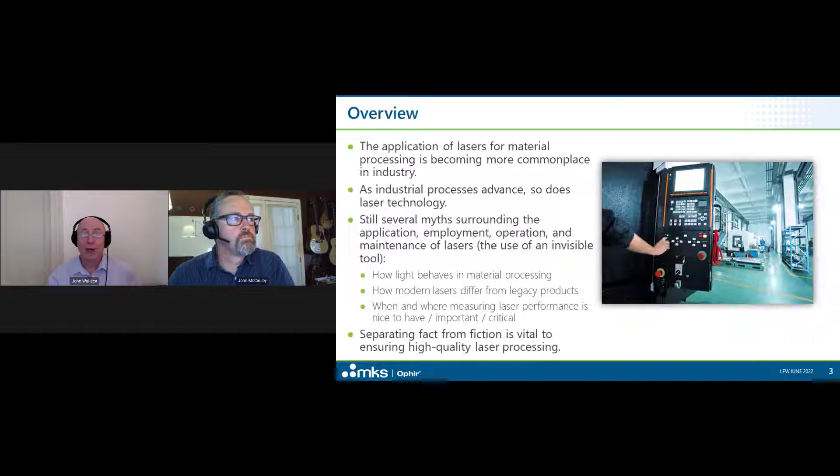Today's event, Laser Myths: What You Don't Know Can Hurt Your Process, great title, will be presented by John McCauley, Business Development Manager at Ophir.

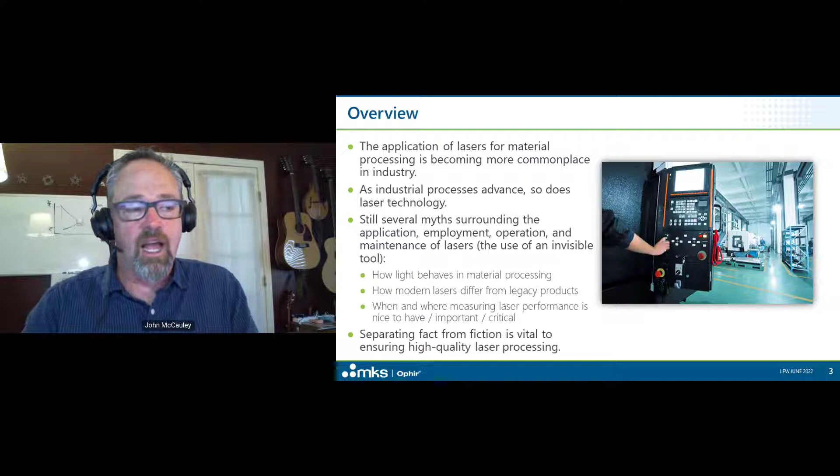So separating fact from fiction, separating these myths from what is actually going on, is really vital to ensuring that you, first of all, start off with a high quality laser process, and second of all, maintain that laser process at a high quality. So that's really why we're here today.

So, when we talk about the maintenance, the operation, the purchase of a laser system, there are a lot of similarities between that and the purchase, the operation, and the maintenance of an automobile. So I'll try to tie a lot of these concepts to the operation of an automobile, because I think that's something that we can all relate to.

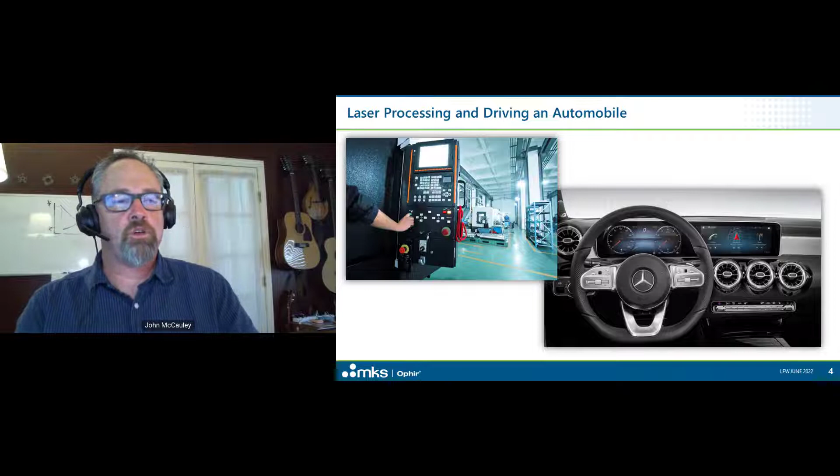We're all very familiar with it. We've all purchased vehicles. We've all maintained them and operated them. So whenever possible, I'll hopefully be able to tie that illustration into what I'm talking about to make the concepts a little easier.

So what we're looking at here is a picture that I grabbed about 3 years ago. It is the dashboard for a Mercedes-Benz A-Class. At the time, I think it was a concept.

I'll be honest with you, I don't know much about Mercedes-Benz cars. Ophir just simply doesn't pay me that much.

But anyway, I assume that this is very similar to the way dashboards are looking today. So if we take a look at this dashboard, we can start to get an idea of the types of information that we get from it. There's information that is vital to its operation. There's information that's nice to have. There's information that's very helpful to its operation.

We start to look at all these things that we read. We've got the speedometer, the tachometer, the odometer, the fuel lights, the engine lights. We've got GPS. We have phone. We have all this information that we're almost being bombarded with. And again, a lot of it is very useful to the operation of this vehicle. A lot of it is vital to the operation of this vehicle. A lot of it is vital and useful when it comes to the maintenance of this vehicle.

We've just grown used to having a lot of information being presented to us. And that's the way we, in this day and age, operate and maintain a vehicle. We'd like to have this information. We'd like to know how our car is performing. We'd like to know when maintenance items are relevant.

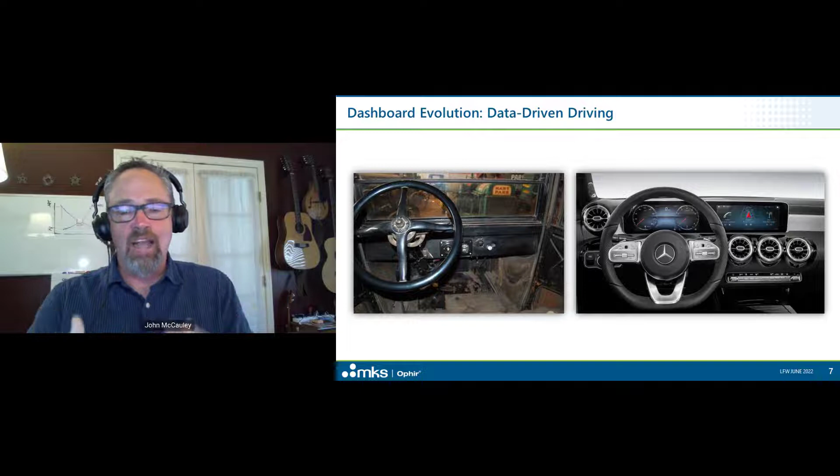So why would we operate and maintain a laser system, which is more expensive? It makes you more money. Why would you operate that with the same mindset, not knowing how it's performing? So that's kind of what we're here to talk about today. You look at these two cars side by side, there's roughly 100 years difference. So there are a lot of changes, a lot of general changes that we'll talk about just in a second.

Obviously, technology has changed. There's more stable performance. There's more creative engineering of the processes. So all the thousands of processes that go into the making of the modern day vehicle have evolved over the years, as well as the production environments that these vehicles are made in. They've become smarter. They've become more efficient. A lot of things have changed over the years, but there are some things that are similar between these two vehicles. What remains consistent?

Both of these cars still must be maintained. They must be repaired. Automobiles are still made up of physical matter, things that you can touch. And because of that, there's going to be catastrophic failures. There's going to be changes that happen because of just being made up of physical matter. Also, the operating environments in which these two cars are going to operate haven't really changed that much in 100 years.

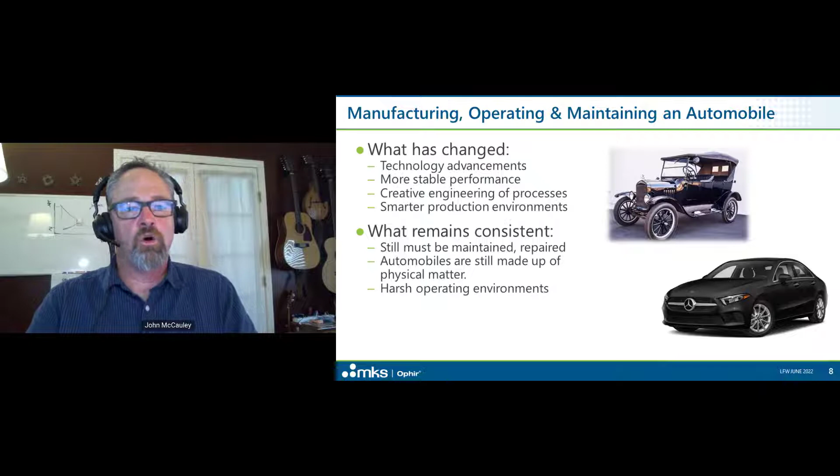Very, very harsh operating environments. So sand and wind and heat and snow and cold and rain, all these things take a toll on the vehicle, which affects its maintenance and its operation as well. So tie that to the example of what we're talking about here today. What's changed with lasers over the years?

There's been material advancements. The materials that are going into these processes have changed, have become more sophisticated. The laser sources have become more stable over the years, just as technology gets better. There's been more creative engineering of the work cells. Systems integrators are doing a fantastic job with taking some of the problems that have evolved over the years and solving those problems in the work cells.

Much smarter production environments, and much smarter from the collection of data in some cases, allowing you to make those processes smarter. But there's also things that haven't changed, very similar to those cars. The applications of the lasers are always going to be pushed. The operational parameters are always going to be pushed. Faster cycle times are attempting to be achieved, so you can get parts out the door quicker. Quality is attempting to be increased or at least maintained at the same level.

Lasers and laser systems are still made up of physical matter. There's still going to be those sometimes catastrophic failures of components just because the systems are made up of physical matter. Also, very similar to the automobile, the harsh production environments that these lasers operate in sometimes have very catastrophic effects on the laser system. They must be dealt with in such a way that they don't drastically change the performance of the laser.

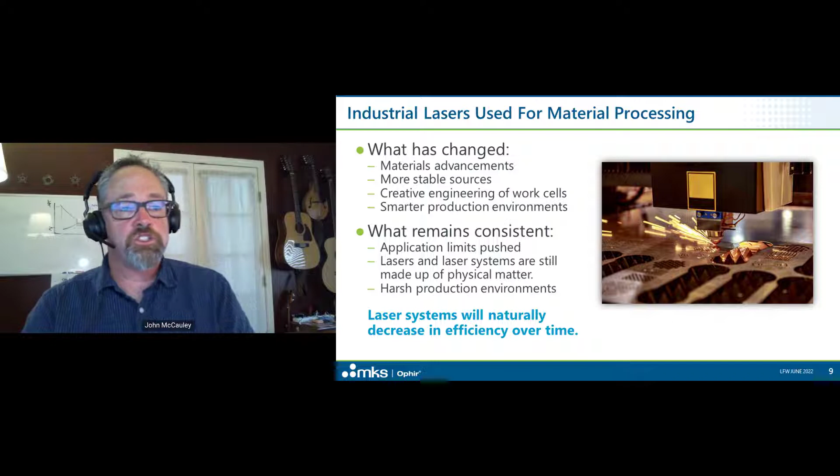But having said that, laser systems will naturally decrease in efficiency over time. It's very important, I'll make the case today, that through the measurement of its performance, that's when you know how and when to take proper actions on your laser system when those changes take place. Okay.

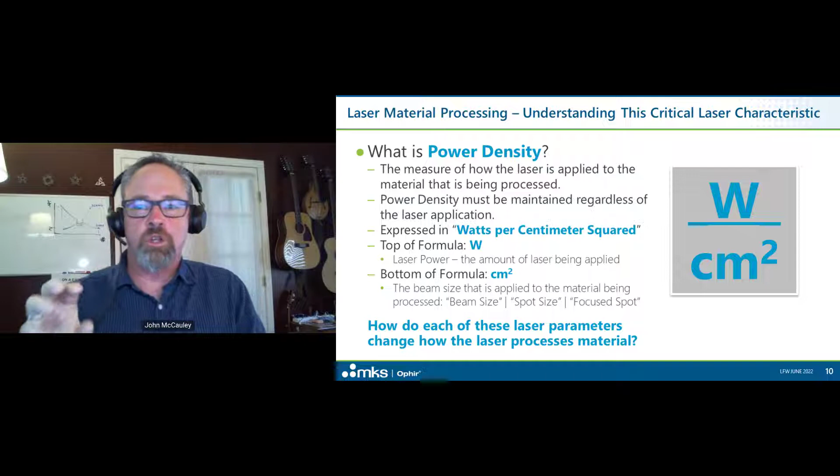If I could take your car, and with respect to the maintenance of your car, put that battery current thing on your dashboard and have that be your indicator on your laser system of when you must take action, what would that one single laser parameter be? And that is the idea of power density. So what is power density?

I like to define power density, just in a general term, as the measure of how the laser is being applied to the material that is processed. It's really where the rubber meets the road with respect to laser processing, where the laser light meets the material that it's processing. That is really how the laser is defined with respect to how that laser is going to interact with the material that's being processed.

Power density must be maintained regardless of the laser application. And what I mean by that is it doesn't matter if you're using a laser for welding, for brazing, for cutting, for marking, for heating. The intended result of the laser requires some kind of power density. And the power density is defined by two laser performance characteristics. It's expressed in this expression, watts per centimeter squared.

You see in the top of this expression, the laser power. The laser power is the W, it's the watts. It's the amount of laser light that's being applied to the process. The bottom of the expression is centimeter squared. This represents the beam size, the spot size, the focus spot size. It's called several different names, but it's the amount of laser light that's being focused down to the process. And those two characteristics are going to define how that laser interacts with the intended process to have the intended result. How do each of these laser parameters change how the laser processes the material?

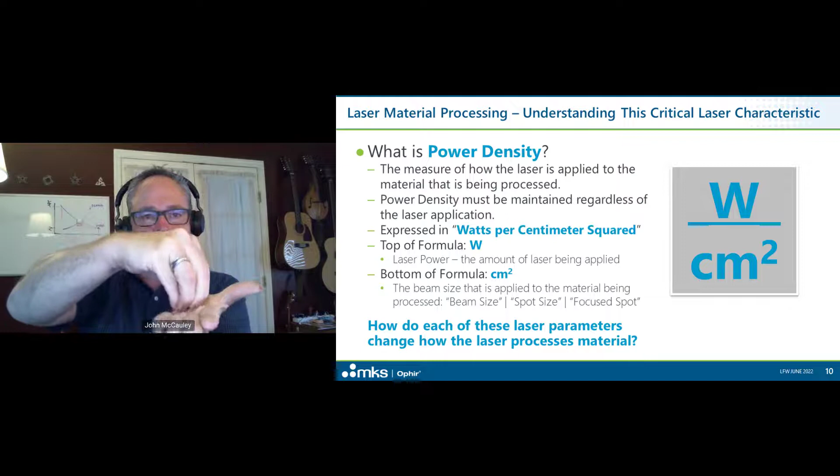There is sometimes what's called a thermal effect that happens on your laser system that causes the location of the focus spot to drift upwards. So now instead of focusing down on the process, you have a focus spot that is drifting off of the process. What's that doing at your work plane? It's increasing the beam size at your work spot. So that is increasing the beam size at your process, which is going to do what to the power density? It's going to decrease your overall power density. It's going to, again, reduce the efficiency of that laser process.

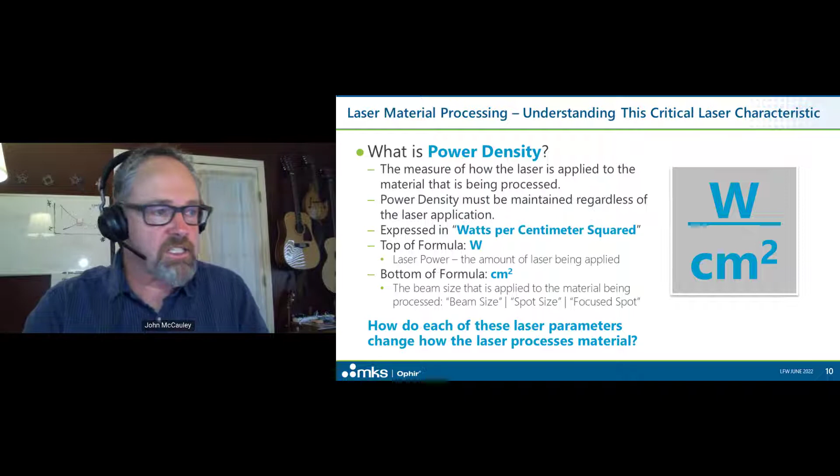All right, so we come to the myths. I'd like to share with you 5 myths, 5 things that have been told to me over the years with respect to laser performance and why or why not you should measure your laser. Okay, so myth number 1: our laser is very new and very stable. Measuring laser performance isn't necessary.

Okay, so getting back to the automobile, this is oftentimes a mindset that we can adopt when purchasing a new car. Hey, I've bought the new car. I'm in the driver's seat. I can smell it. I'm driving down the road. Nothing can stop me. Nothing can go wrong with this new car. But how often have you heard a story where something goes wrong with a new car? It does happen, unfortunately. We have put a lot of faith into the manufacturing of that car when we buy a new car. But the fact of the matter is oftentimes things can go wrong, even though most times they don't. So let's address this myth.

No matter how a laser is being used, the success of a laser process depends on how the laser is performing. Okay, regardless of where in the life cycle that laser is, the performance of that laser is going to be directly related to how that laser is going to process the material that is being processed.

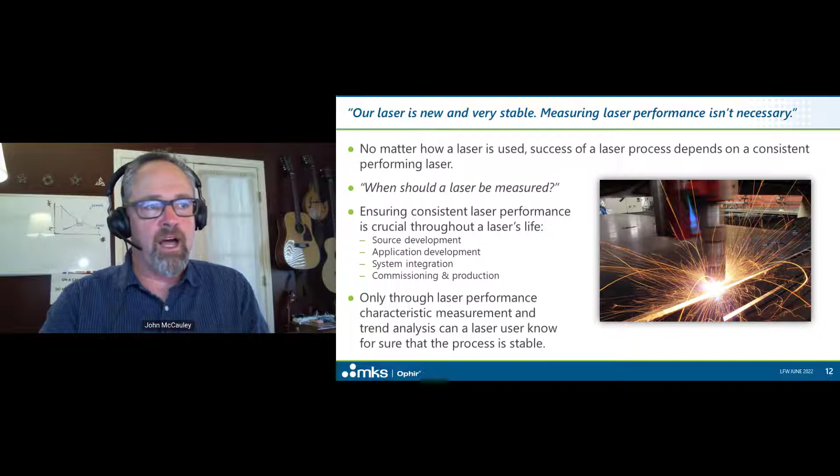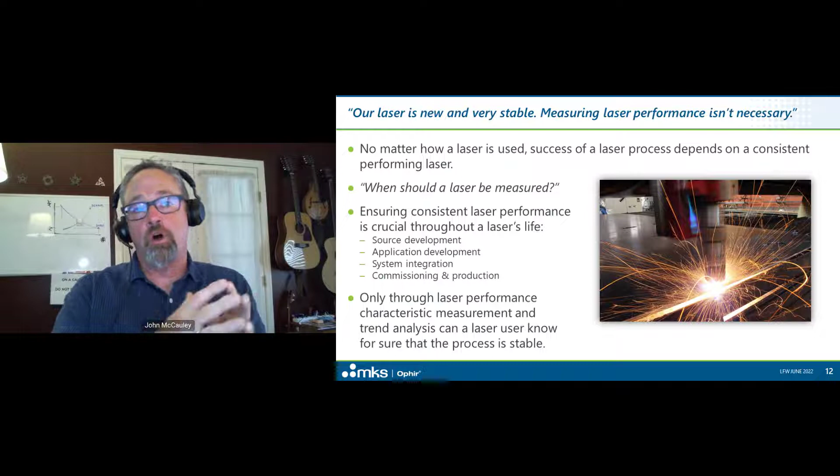So those measurements are very crucial in my mind, and very important to take with respect to the lifetime of that laser. I'll make this statement: only through laser performance characteristic measurement and through the analysis of the trends of these characteristics can you really fully understand how the process is stable over long periods of time. Okay, and I think that's probably realized by most everybody here.

Myth number 2: when the process starts to drift, we just turn up the power and we keep going. This is a pretty ugly one. This is one I'm actually in the process of helping a customer with. Oftentimes there's this myth that when you lose power density, the laser's not performing the way it's engineered to, I'm not going to take a measurement on it. I'm just going to start to tweak on little things here and there. I'm going to turn up the power. I'm going to change the rep rate. I'm going to change the cut speed or whatever else to overcome these drifts in the process.

I'm not going to actually solve the problem. I'm not going to get to the root of why this is happening. I'm just going to make tweaks on the process until I can get it to where the process is consistent. So if you're driving your automobile and you get an engine light, you take it to AutoZone, just clear the engine light. I just want to go on down the road.

I think most families have been in the situation where money is tight. You're not driving the best vehicles. And there was a time when our young family had a minivan. It was a Chrysler Town and Country, and we had the engine light come on, and we went and checked it, and it was a problem with the CPU, some just random code that the CPU was throwing. And it was change the CPU for $1,500, and the only thing that's going to happen is the engine light is going to go off.

There's these environmental factors, the heat, the humidity, the operating environment is just dirty. Contaminated cooling water or purge gas, these can all affect the performance of the laser in some way.

Kind of as a bonus myth, I'll tell you that oftentimes when I talk to relatively older fiber laser cutting people, they probably cut their teeth on a CO2 system at some point, and those maintenance practices have carried over into the fiber laser world. Well, I'll tell you that those optical components are very, very different, and the maintenance of a fiber laser today versus the maintenance of one of those CO2 systems is very different and should be treated as such.

Those modern day optics of the 1 micron lasers are very delicate, and you just can't treat them like the robust optics that you could with a CO2 laser. So just a bonus myth for you.

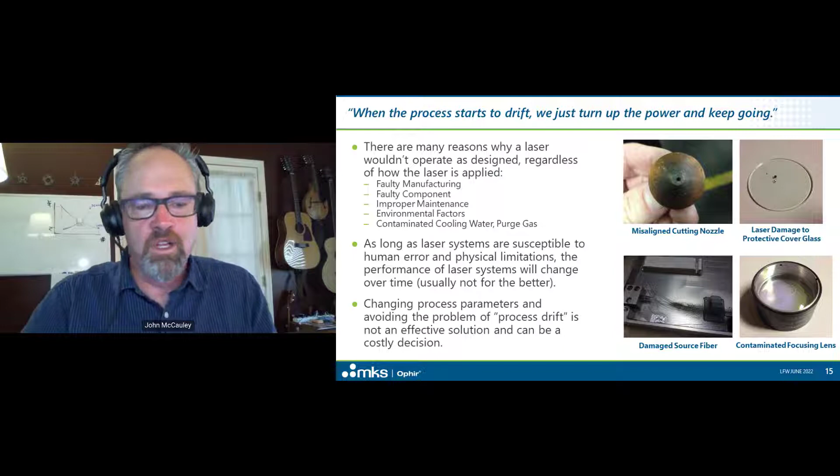Changing process parameters and avoiding the problem, which is really what this is, with some kind of process drift, is not an effective solution and really can be a costly decision. So just turning up the power over and over and over to the point where your process is drifted out of control is really not a very good way of maintaining your laser system.

All right, myth number 3. Measuring laser performance is too costly, complicated, and time consuming. Okay, so at Ophir, I've been in sales selling laser performance measurement equipment, and I'll tell you right now, this is a valid concern. This really is. This is not so much a myth, but I do want to talk about changes in laser performance measurement technology.

So historically, laser measurement components have either been very expensive but very comprehensive, or relatively inexpensive but give you an incomplete picture of how your laser is performing. By that I mean like single data points. Historically, they have been very complicated in the past. Just because of the older technology, they've sometimes been unstable in their performance.

They've sometimes been delicate. You take equipment that's been designed to be in a lab environment, you take it to a harsh industrial environment, and you could have some problems with it just because of the change of environments. And oftentimes there's subjective measurement results. So one person might look at the results and come up with some conclusions based on their experiences.

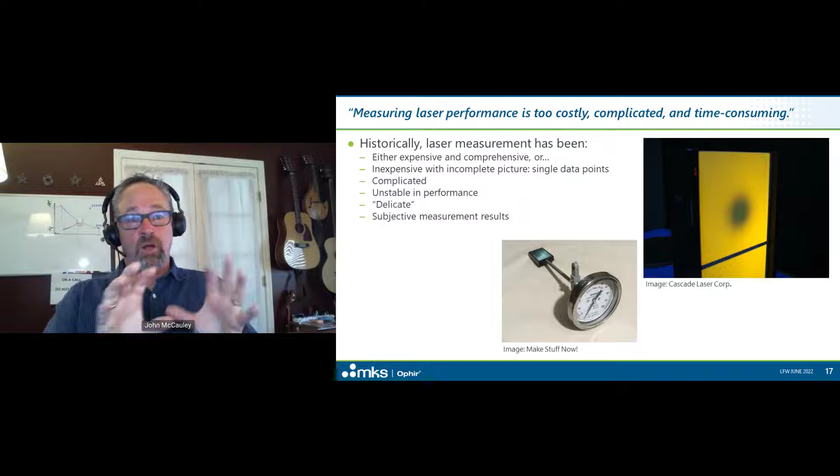Somebody else may look at the measurements and come up with a different set of conclusions based on their experience. We got a couple of examples here. You see to the right here, it's what I call a laser mode plate. It's just a phosphor coated plate that's illuminated with a black light. You shine a laser at it, you can see the laser shape, you can see how the laser is changing. But again, the result is based on the user's experience, and they're looking at that and they're saying, well, I need to do XYZ to my laser in order to make it right. Whereas a new person just starting off with lasers says, I have no idea what to do with that image.

The image here in the middle is what's often known as a meat thermometer. You shine the laser at that chunk of black metal there, and you get a temperature, and that temperature correlates to how much laser is being output. Again, this is one single data point. It doesn't really paint the complete picture of what your laser is doing.

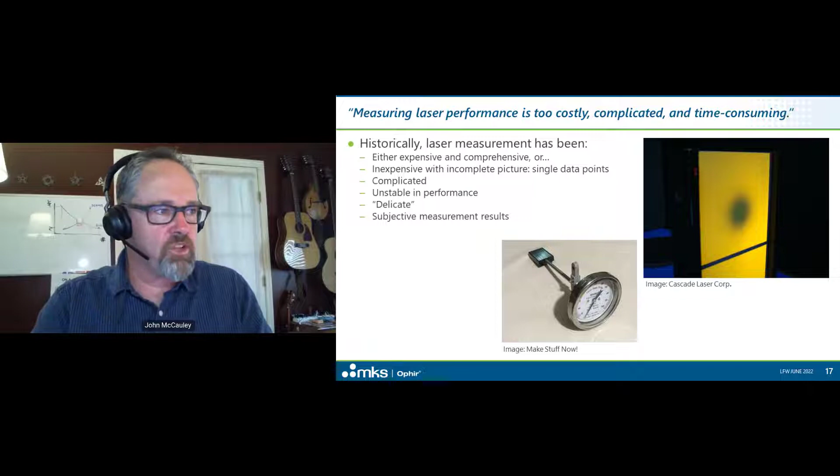So today, comparative to the historic ones, laser measurement systems are of higher value. And notice I didn't say they're less expensive, because oftentimes they're not less expensive, but they are of higher value because they bring very relevant, oftentimes real-time data on how your laser is performing, gives you the ability to trend that data over time, to log that data, to store that data, to compare that data. The laser measurement systems today are of higher value. They're more comprehensive measurements. It gives you the ability to graph and to trend the data.

They're much easier to operate, much more robust in their design, intended to be used for industrial environments. They're just better performing because of the advancements in technology. And also they have come with industry standard measurements. So there's no more guessing on how the laser should be performing. You are actually measuring the performance characteristics against a standard of measurements in most cases. So I want to present to you just some of our products to illustrate this point.

This product is our Ariel. It's a standalone power measurement. It's intended to be used for those maintenance type situations. Very, very easy to use. I don't know how it could be any easier. You turn it on, you put it in the beam path, you fire the laser for just a second or two, and it'll tell you how much laser power was in that measurement.

So it will tell you, number one, where your focus spot is located. And if there are any changes to the location of the focus spot, it will tell you not only how far the focus spot is drifting, but how quickly the focus spot is drifting. So it'll give you a more comprehensive view of how your laser is performing, and so you can know for sure when to take action on your laser based on those measurements.

Okay, myth number 4. We're quickly coming to the end here. Myth number 4: laser processing can be managed just fine with or without laser measurements. Okay, it's a valid concern. It's a valid viewpoint, but I will make the argument today that without fully understanding the operational parameters of your laser, you can't really manage the process very well.

Just like driving the car without the dashboard. You can drive your car without a dashboard with all that information that the car feeds back to the operator, but how do you know when to take maintenance? How do you know how fast you're going? How do you know when to fill up for fuel on an internal combustion? How do you know when to charge your electric vehicle? Without that dashboard, without that very important information, you're just at a loss on how to fully, most effectively operate that piece of equipment.

So historically, there have been statements made to me like, this laser process is so robust, there's rarely anything that goes wrong with it. It's a valid viewpoint. That's very, very true when a system is first run off, when a car is brand new, when a laser is brand new. But because of the physical changes that are going to happen to your laser system, there are some changes that are going to take place. How do you know when to take maintenance if you're not taking measurements on your laser?

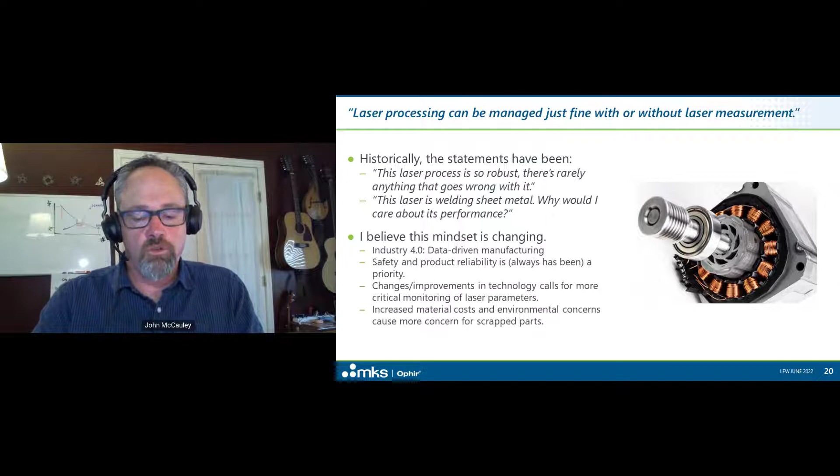So the concern with scrapped products causing engineers to take a closer look at monitoring system performance so that scrap is reduced really is a valid concern.

And then finally, myth number 5: legacy laser measurement technologies are time tested and give us enough information about our laser. And this mindset, in my mind, goes back to someone who does have a lot of experience with maintaining a laser. Maybe they cut their teeth with CO2 cutting lasers and they're going into fiber lasers. They do have a lot of experience with how to maintain a laser, just a lot of tribal knowledge. And oftentimes they do use these legacy laser measurement technologies in order to measure the laser.

And I say good for them. That's great that they have that knowledge and they have that experience. I want to bring up this slide that we talked about earlier, and talk about 2 of the points. Historically, laser measurement has been inexpensive with an incomplete picture. Oftentimes they give you single data points like this meat thermometer here in the middle, or they give you subjective measurement results like this mode plate here.

One person can see the mode plate and say, I need to do XYZ to this laser. Another person will take a look at the mode plate and say, I think that laser looks good. I don't think anything needs to be done. There's a disagreement. One person is right and one person is wrong. How can that conflict be resolved?

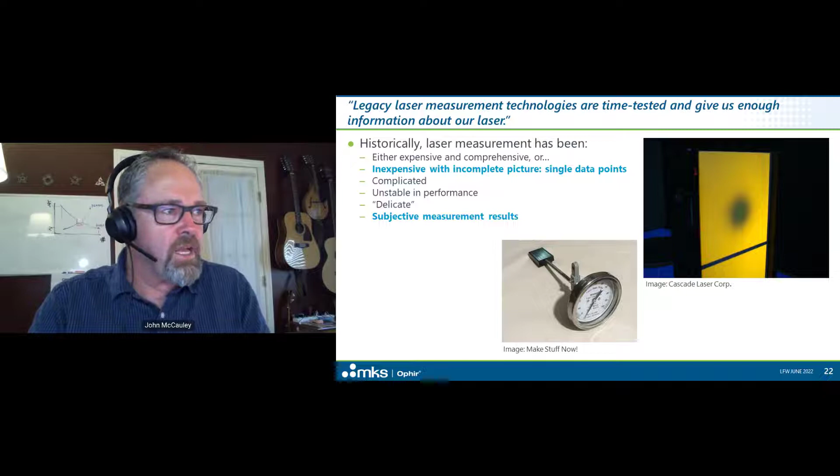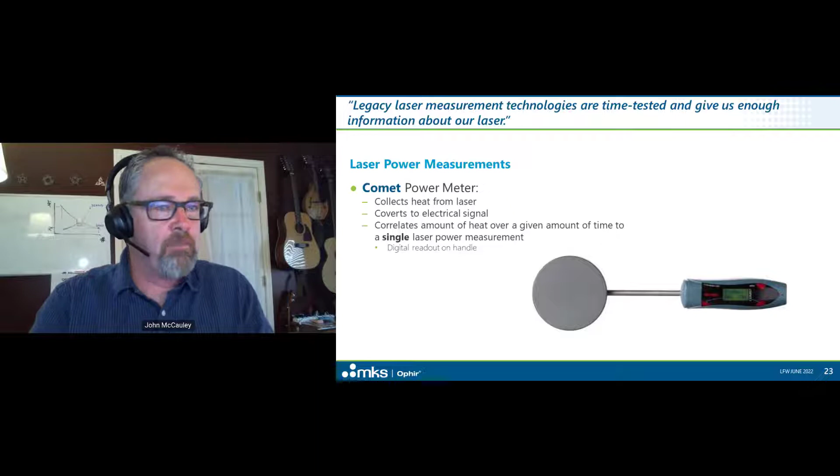Laser power measurement. This is a product called our Comet, made by Ophir. It's relatively older, relatively inexpensive, very similar to that meat thermometer. You fire the laser for 30 seconds, you get a number based on how your laser is performing. It's good for its time. It's a good, quick and dirty check, but it does only give you one bit of information compared to this power meter system, which has a sensor that you put underneath the laser light, and then you have a meter that's coupled up with that sensor.

And this system, when you fire the laser for several seconds, it's going to give you a trend. It's going to let you know that the laser power has stabilized, or if it's going down, or if it's going up and down. It's going to give you some idea of what your laser is doing over longer periods of time, versus that one single data point. It's going to give you a dynamic laser measurement.

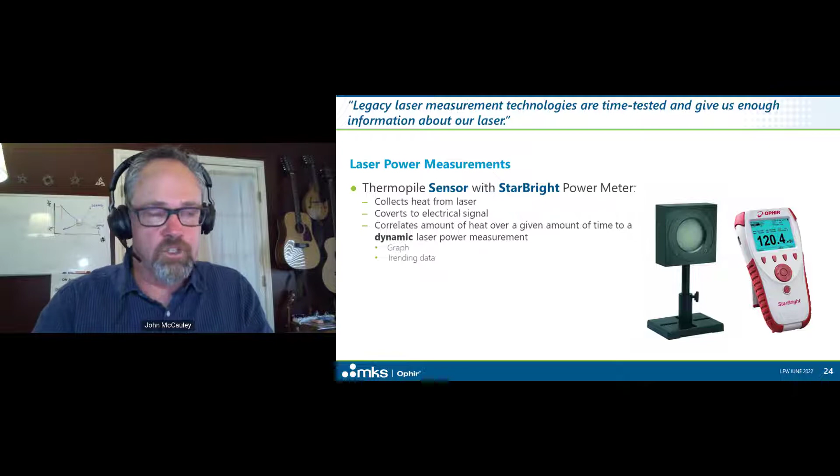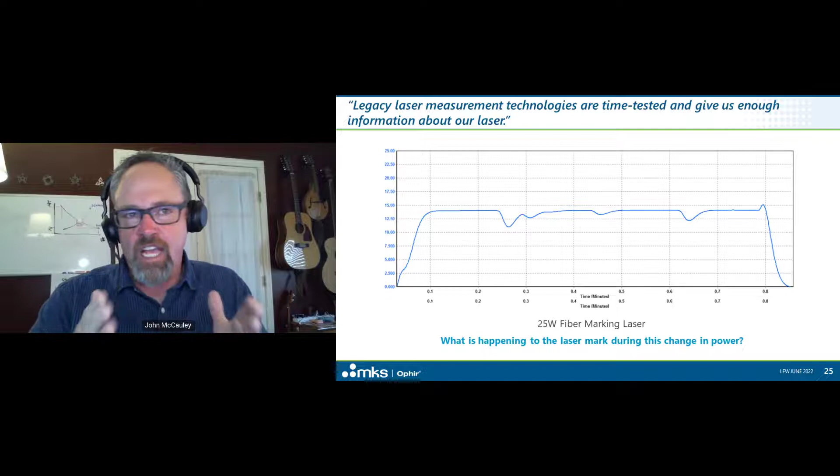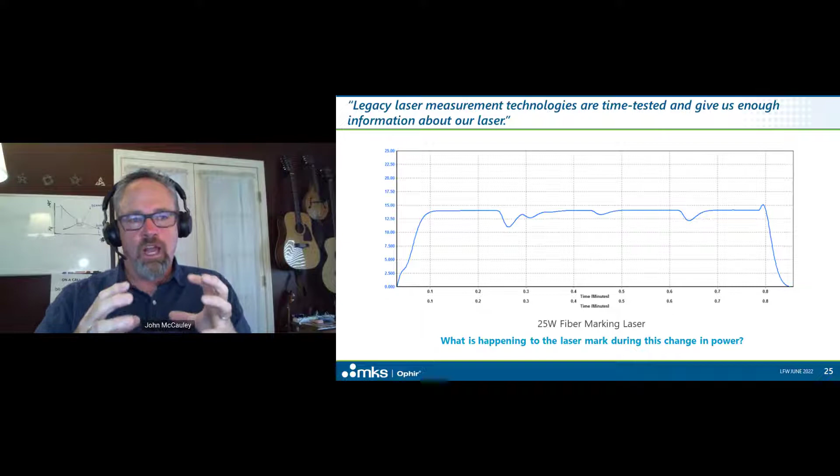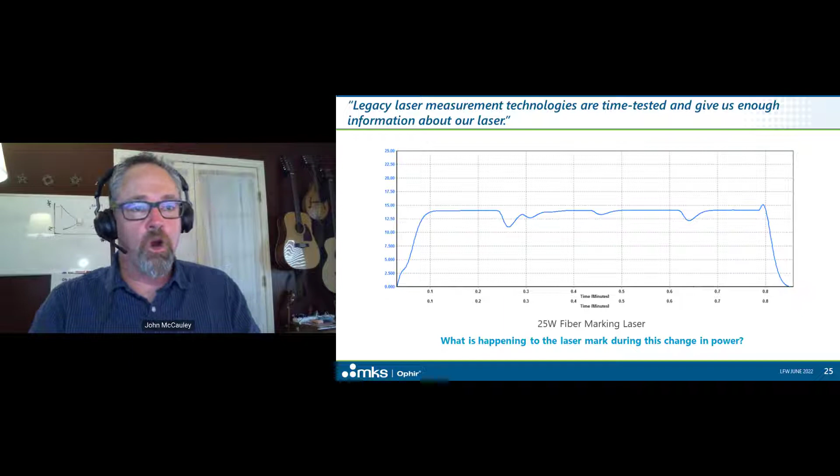Well, think about what that mark would do if it was a minute-long mark. Say you were marking identification tracing with a 2D matrix or a barcode or something like that. What's happening to that laser mark if that laser power is going up and down? Well, ultimately you're gonna have an inconsistent mark. If you're marking a 2D matrix, then you could have a missed cell, and it's going to completely throw off that mark and cause it to not be readable, for instance.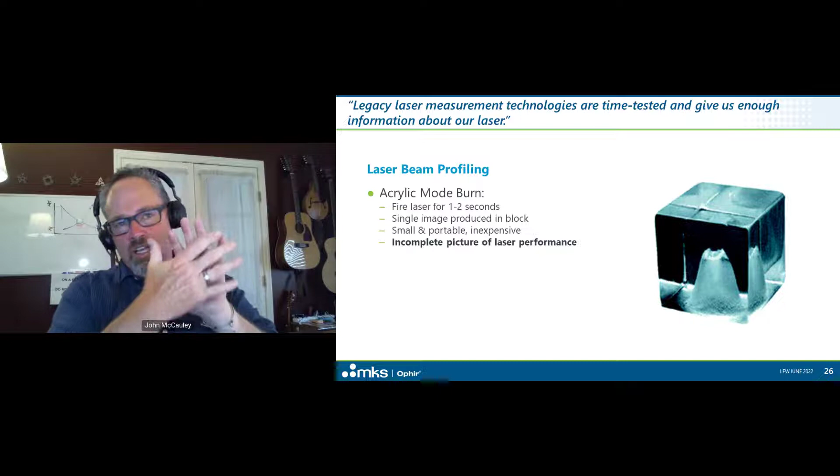When we talk about laser beam profiling, we look at this relatively legacy technology, the acrylic mode burn. Acrylic blocks are very cheap. They're very portable. With tribal knowledge, it's very useful information. But again, it's only giving you one single data point. You fire the laser for 1 to 2 seconds into this block, you get a picture of what your laser is doing, a collective picture over that 2 seconds that the laser was on. It's a very incomplete picture of your laser performance. These are images.

Compare that to a camera-based beam profiler, which will give you an instantaneous image of what your laser is doing. It will give you those industry standard measurements, but it'll also allow you to see what your laser is doing over longer periods of time. Are there any changes that are happening with your laser?

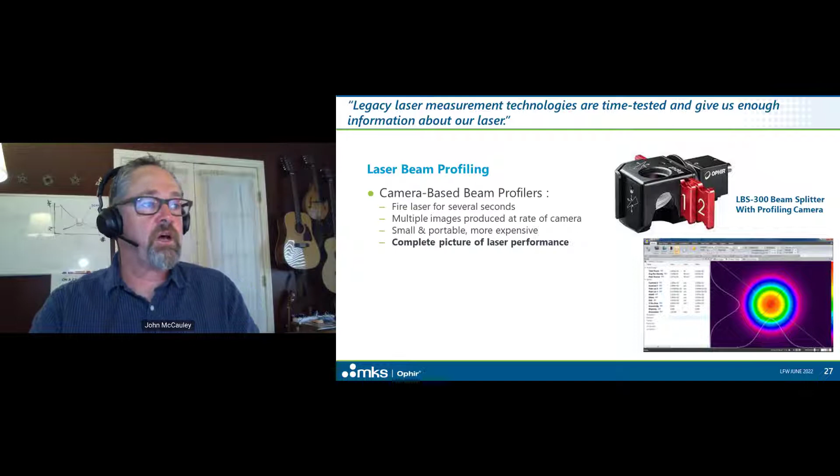This particular product is a beam profiling camera with a product called the LBS 300, which is a laser beam splitter assembly, which attenuates the beam before it reaches the camera. So that's what you're seeing pictured here. I want to show you some images that I captured on a 5 kilowatt CO2 cutting laser and just try to illustrate this point.

The laser turns on. It is of a certain shape. 1 second later, you see how dramatically different the laser beam is. It's much smaller. The beam shape is much smaller. And then it starts to increase in size, and it just starts to basically fall apart. So 2 seconds later, it starts to grow. 3 seconds later, you see a larger beam. 4 seconds, and then several seconds later, the beam has completely fallen apart.

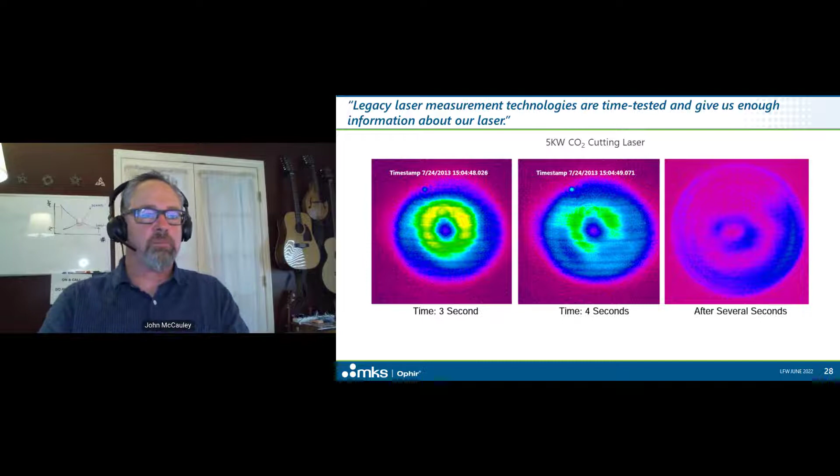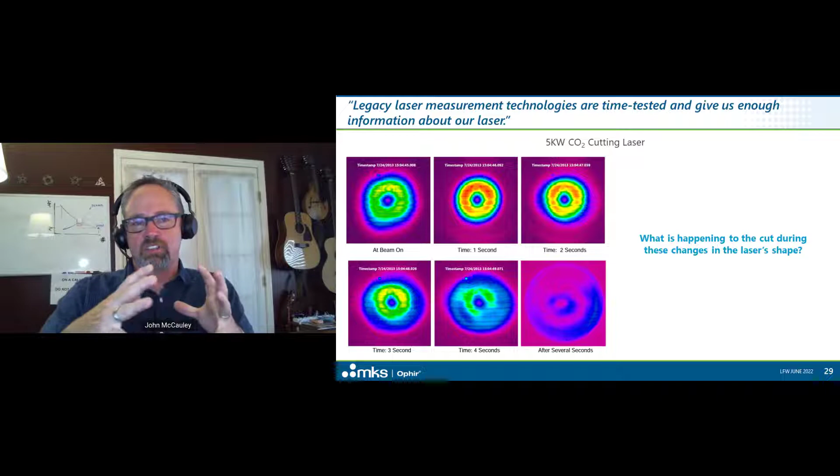Well, think about what the laser is doing. What if this was a very long cut, for instance? What would the laser be doing? Well, the laser would be piercing. It would be starting to cut fine, but you can see, at about 3.5 to 4 seconds, because the shape of this laser is changing so much, you would completely lose the cut.

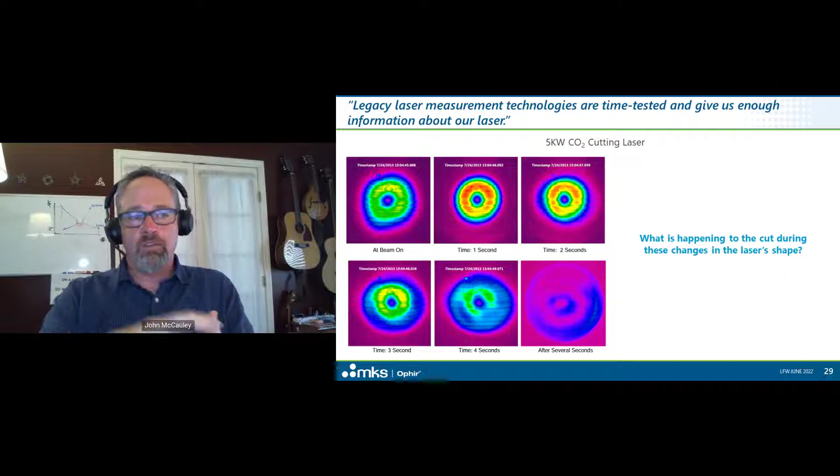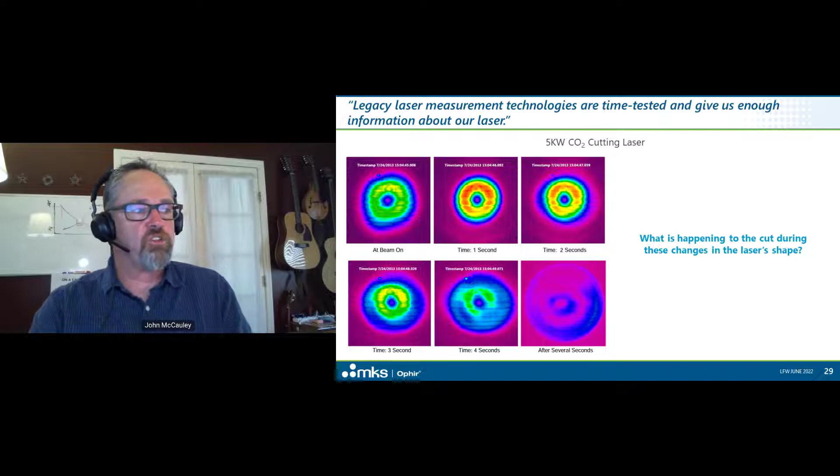Now, as a laser operator, you might be tempted to just turn up the power. Well, I maintain in this case, the power is not the issue. The issue is that there is some kind of thermal effect on the laser system that's causing the beam to change shape. So turning up the laser power may have the desired effect, but it's probably going to only have the desired effect for just a short amount of time before you really run into some problems. But without measuring your laser, you wouldn't have known your laser is doing this, and you might be tempted to put off that maintenance.

Okay? Very true statement. If you have a process and you want to improve it, there's no way to improve on that process or that experiment or whatever you're doing unless you're measuring the results. That makes sense, right?

So here are two different men who lived at two different times, about 100 years apart, in two different realms, two different fields of study, and they're saying the same thing. If you want to improve on something, if you want to manage something, it's really impossible unless you're measuring it. You can't really manage or improve on something unless you're measuring its performance and know how to build on those results with respect to the management and the improvement of your process.

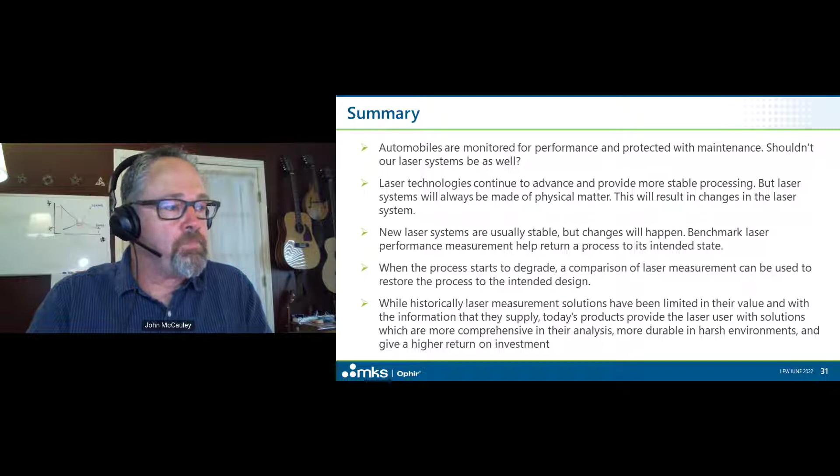And then finally, while historically laser measurement solutions have been limited in their value and with the information that they supply, today's products, as I hopefully illustrated, provide the laser user with solutions which are much more comprehensive in their analysis, more durable in harsh environments, and really do give a higher rate of return on your investment. So, John, I'm going to turn it back over to you.